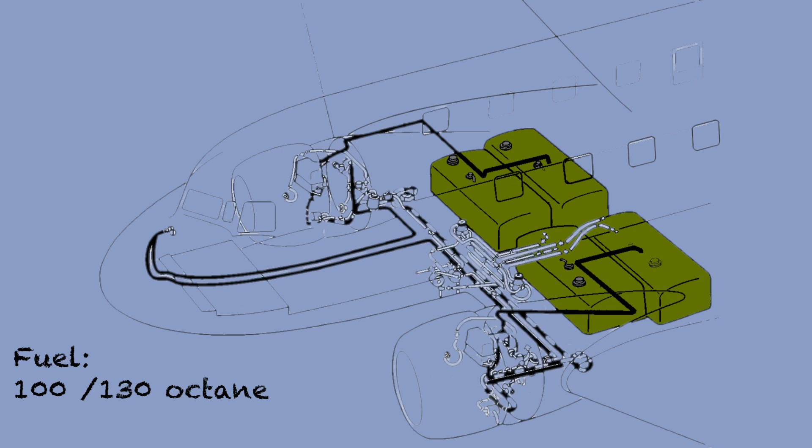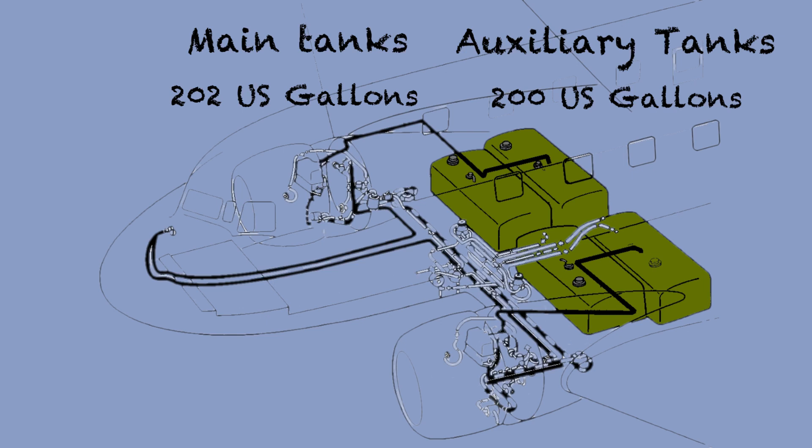The DC-3 uses fuel with octane between 100 and 130. The tanks are made of two shells welded together, with a total of 4 tanks: 2 main tanks and 2 auxiliary tanks. They are located between the engine nacelle to under the fuselage. The main tank capacity is 202 US gallons and the auxiliary tank is 200 US gallons. Each tank is equipped with a float assembly and a 28-volt liquidometer, connected electrically to the fuel gauge.

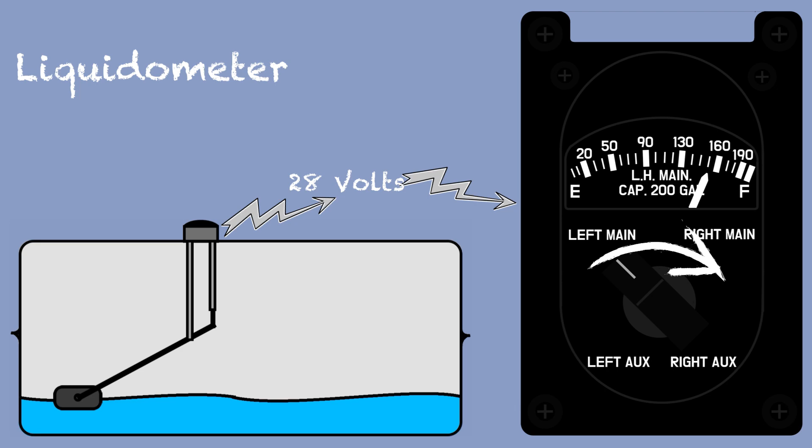The fuel gauge shows only one tank at a time. To check the fuel on all the tanks, you need to turn the selector, but turning only clockwise to prevent jamming. The main tank has to be used for takeoff, climb and landing, and it is recommended to wait 1 hour before using the auxiliary tank. That will allow enough space in the mains for the carburetor venting.

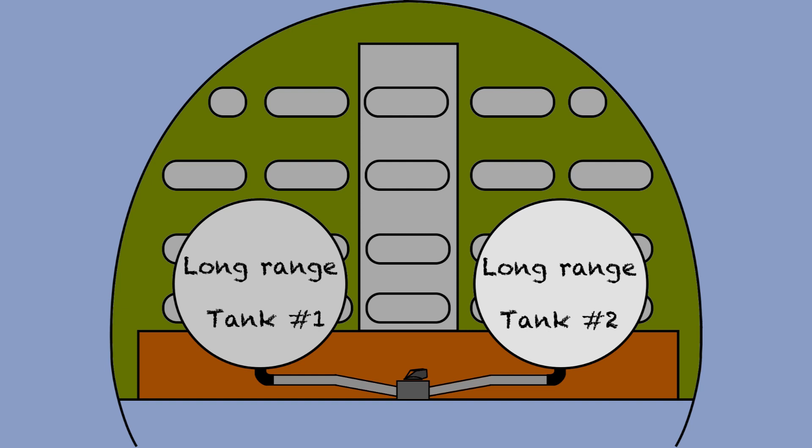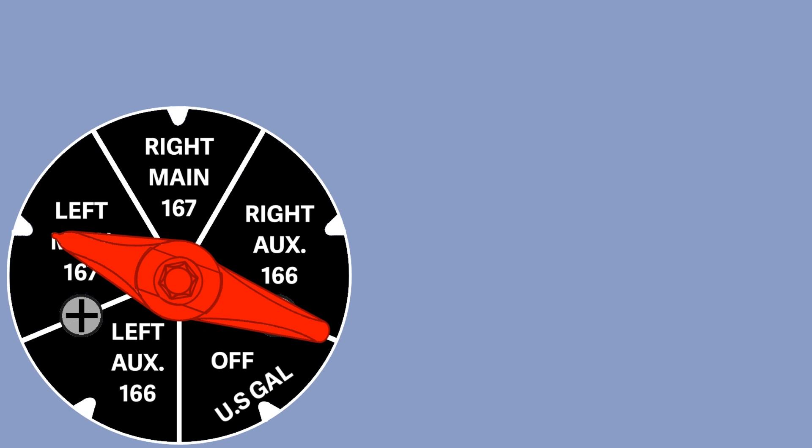A long-range tank can be installed in a cargo area just behind the flight deck. The line from the long-range tank is connected after the selector valve and before the strainer. When the long-range tank is in use, the main selector valve must be in the off position. If you don't turn off the selector valve, the fuel from the long-range tank will fill up the selected tank by gravity. If this one is full, the fuel will drain through the vents.

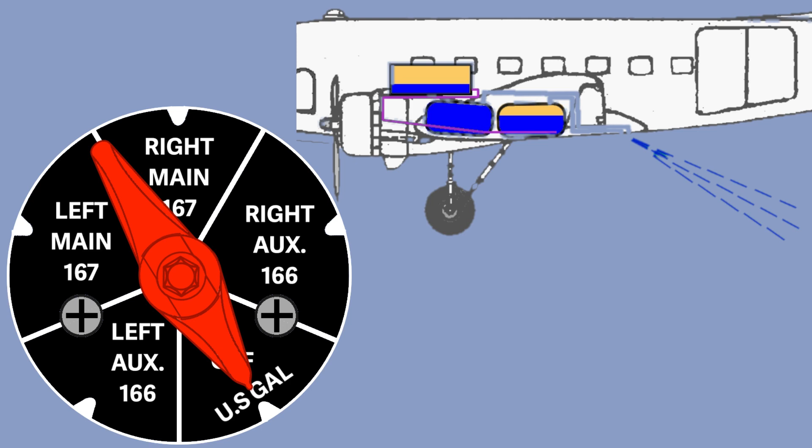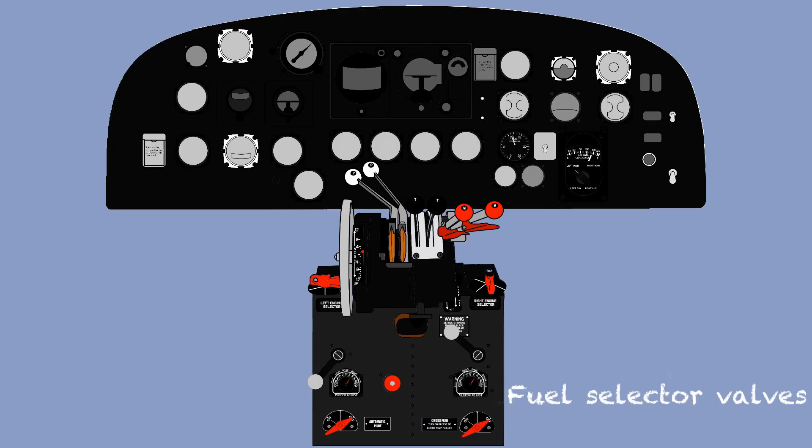2 selector valves are installed on the side of the center console. In normal situations, the left engine uses the left tank and the right engine uses the right tank. But in a situation of unbalanced fuel or a loss of one engine, fuel can be taken from any tank.

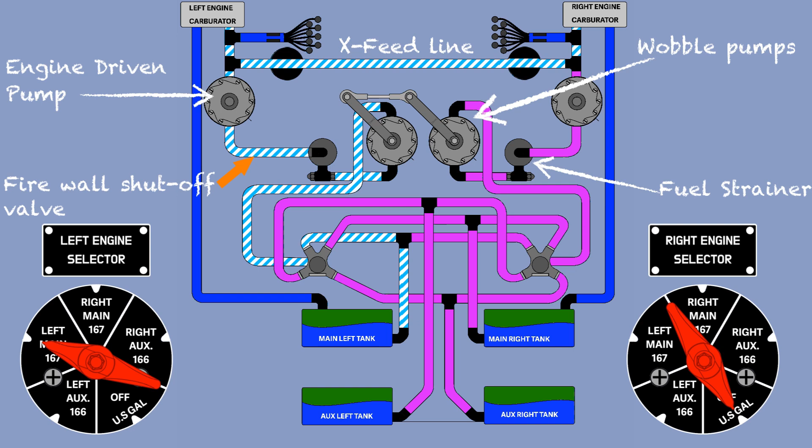For the early version of the DC-3, the crossfeed line is installed just after the driven pump, in case one of these fails, so the other driven pump will supply fuel to the engine. But because an electric pump replaced the wobble pump in a later version, the crossfeed line has been removed.

2 valves control the crossfeed line, but operated by only one control in the lower center console. The reason for having 2 valves is that in case of a leak in a fuel line, the engine will not lose power and lose all the fuel.

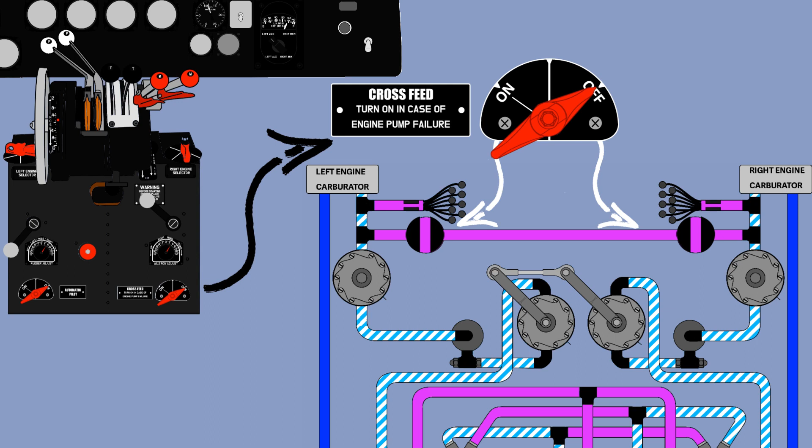After the engine driven pump or crossfeed valve, the fuel is split. On one side, the fuel goes to the engine primer spider and to the engine carburetor. The carburetor is equipped with a vapor return line. On some versions, the vapor line is connected to both main and auxiliary tank of the same side, and on some versions, it is connected only to the main tank. The return line can drain from 1 to 5 gallons per hour.